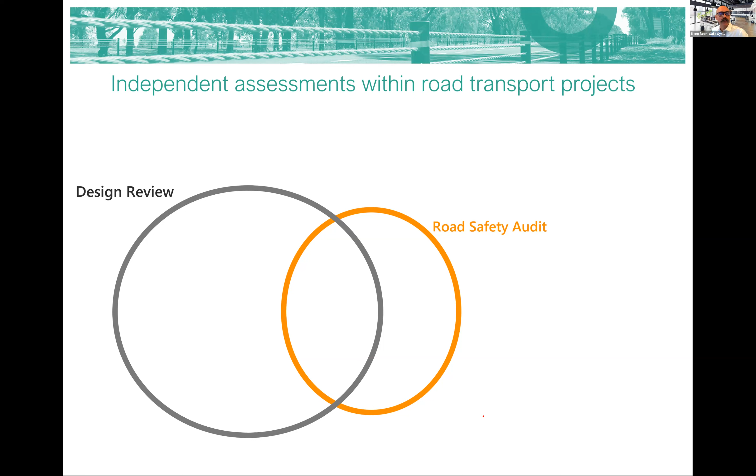So there's also design reviews, and that's a process where if there's a new design of upgrades to infrastructure, changes to the road environment or street environment, the designer will do their design and have a colleague or somebody do a review of their design. So that will also intuitively look at safety issues and identify things. There's a bit of overlap between a road safety audit and design review, but there's many things in the design review that are not covered in audits, and vice versa.

So safe system assessments, which is what we will be going through over this week, do overlap with road safety auditing in its current form and some design review stuff. But there is quite a bit that sits outside here that's not covered in a road safety audit. And the reason I mention that is a very common thing that will be said to me or to others, and probably to yourself after you've done the course, is, well, I don't need to do a safe system assessment, we get a road safety audit done. So they're not understanding there are things outside of that.

And that's everything from identifying particular issues, but also the way things are presented and what we can use the safe system assessment methodology for. So there is extra stuff in there and extra value. We have these other things, safety in design, which many of you will have heard about. There is overlap again in all of these, but safety in design is a little more focused on the safety of workers in the construction of whatever these changes are, in the management, the maintenance, the decommissioning. So there is a little bit of overlap there.

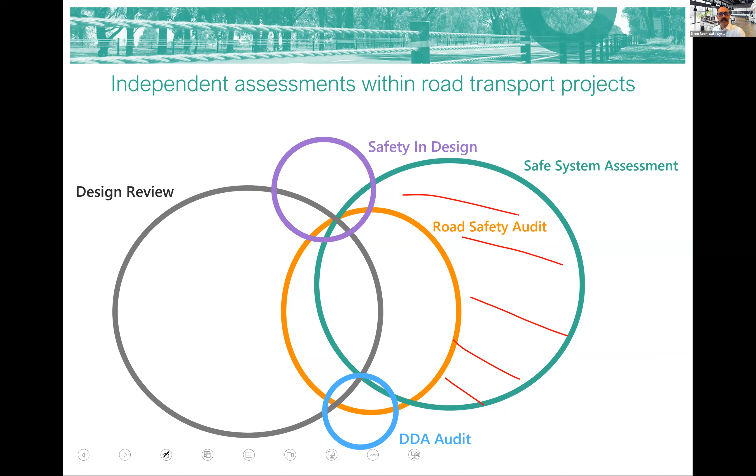Okay, so I might get into some content now, and I will be asking you a few questions shortly as I tick along. But the first thing we need to do in a safe system assessment course is just make sure everybody is on the same page with what this thing, the safe system, is. So some of you are absolute experts in the safe system, and that's great. Some of you, it's probably a new concept. Some of you probably feel you know what the safe system is. You've got some key phrases that you bring out.

I'm going to really dig into practical understanding of the safe system philosophy. So we're all on the same page as we delve into then being able to look at a project or an existing bit of road and understand how well it aligns with these principles of the safe system. So by the end of this module, we're going to go through and recap or list the elements, pillars of the safe system. We're going to determine kinetic energy thresholds for different crash types.

We're going to look at the difference between traditional approaches to road safety and the safe system approach. We'll touch on behavioral change and vehicle safety interventions, which is an interesting thing to do, and I'll explain how they fit within a safe system assessment context. And we will talk about speed as a critical element to the safe system approach.

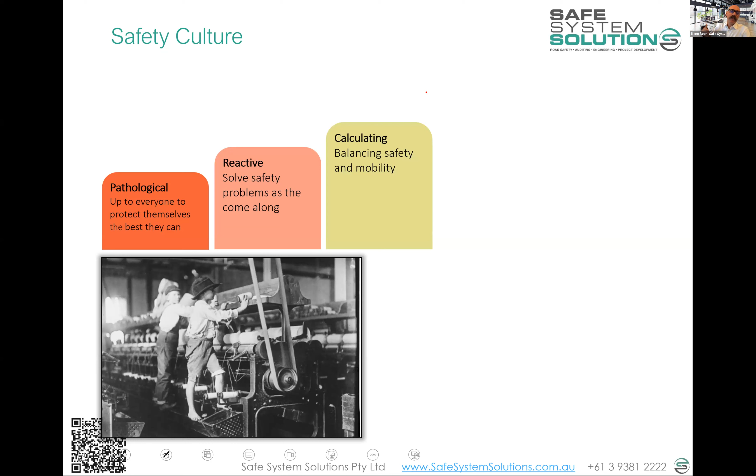Then there's this elevation up to what we call a calculating safety culture, which essentially says the economists get involved, and they say, well, actually, we've analyzed all these factories, and if we invest in guards for all these different machines, we will, over time, reduce the number of payouts to injured parties and the families of workers that are killed.

And that's going to be good. Less payouts, and actually the machines aren't down, and so we're producing more widgets, so we are able to make more money. So this investment of, I don't know, £30,000, there was pounds back in these days, is actually going to return £90,000 over the next 10 years, and we've given it a benefit cost ratio of 3, right? So that's what we call a calculating safety culture.

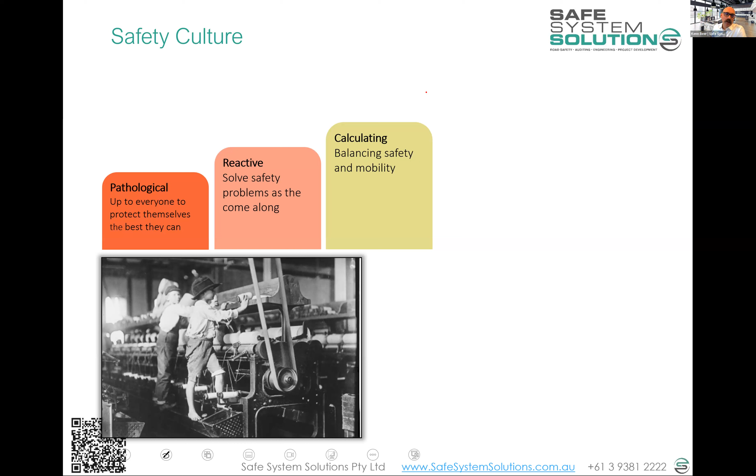Where we go to from there is what we are aspiring towards, what is safe system aligned, which is what we refer to as a proactive safety culture, which says we need this very high level of safety, and we will make widgets within the envelope of that safety. If we go outside of the envelope of safety that we've set, widget production will stop until we're back into that envelope of safety.

Now that makes sense for us in manufacturing. Like WorkSafe will stop all production in a factory if they believe something has stepped outside of the risk safety envelope. And the last thing you need to do is maintain that high level of safety. It's like that needs continual maintenance at a cultural sense. You need to continue to ensure the culture of safety is there. And of course, all of the equipment associated with safety is maintained.

So when we think about the road transport system, as I'm sure you've already made this analogy in your mind, we have parts of the road system sitting in most of these, but we certainly have huge pathological safety approaches, which are essentially that we are handing out licenses to people, sending them out into what is an unsafe system and telling them that they have to be safe.

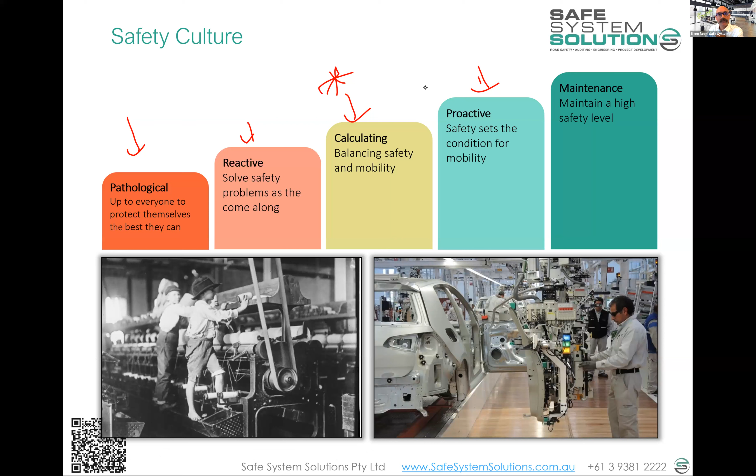So in terms of the proactive versus calculating, you touched on a really good point, and I think it's an excellent point. Having had to deal with a number of projects, trying to prioritize them, or work in that environment where they prioritize them. Yes. I've come across something called wider economic benefits, where people use these wider economic benefits to justify more social projects.

Yeah. And I've always thought that we should be putting a greater value on non-financial elements in determining which projects go ahead. Absolutely. I think you're right. And there is more and more understanding and acknowledgement of the externalities, as the economists would call them, things that aren't directly in the traditional transport economic models and calculations. So I think there is more and more coming along.

Safety is a really interesting one, in the sense that, and I'll touch on this later on in today's session, the desire to blame an individual for a crash is so rife and so integrated into our society that people are less inclined to utilize the safety externality as an economic feature. I will explain that a little bit more.

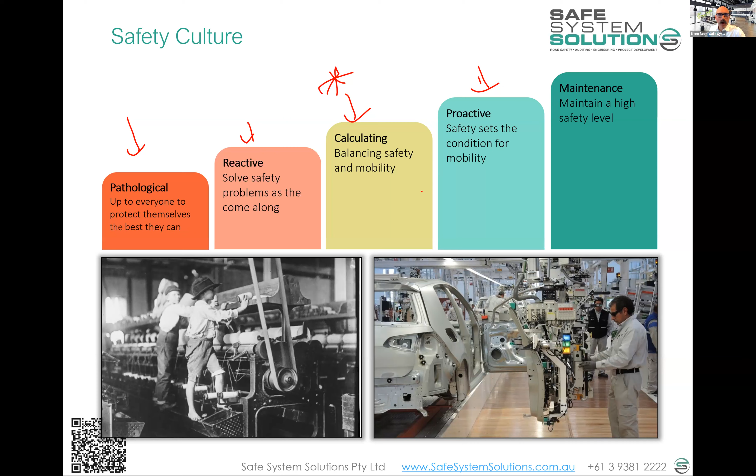Let's keep ticking along. And I'll pop up a little quiz just to get you doing a few things. You are not marked on this quiz. This is just recapping what I've been talking about, and that little discussion with Justin as well. Just making sure we're all on the same page on the safe system before I jump into the next bit. Hopefully that's popped up on your screen, multiple choice. Don't get too concerned because you're not marked on it. In fact, we don't even know who fills out what.

But we like to see what the group's saying. I'll give you a minute to do that. We will have a halftime break in about 15 minutes as well, so you'll be able to fill up your coffee at that point.

Now, you haven't been told the second one of these, the Usain Bolt one.

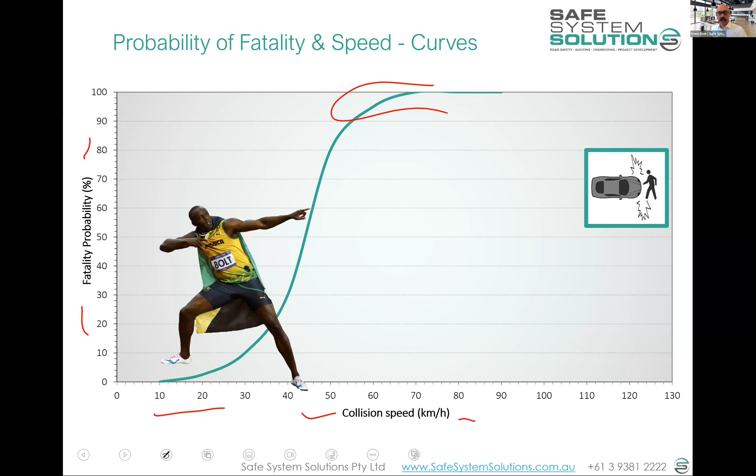Okay, you can test that if you want. Run as fast as you can at a tree, and you should survive, and you should recover to lead a normal, healthy life based on your maximum running speed and your ability to withstand physical force. It's a general correlation.

But there's a really interesting aspect to this, and it's this kick-up point. It starts to go exponentially bad around that 30 kilometer per hour mark. So, small increases in speed above that start to get really big in terms of impacting more of our community, in terms of their ability to withstand physical force. It's not that there's no risk this side of it, but that's a really exponential kick-up point.

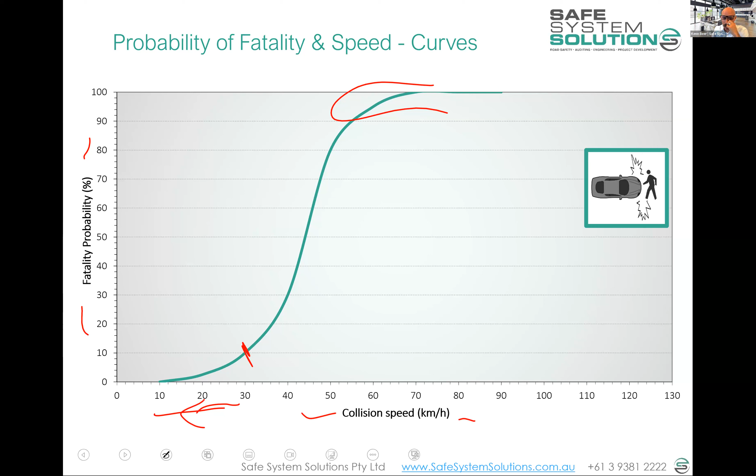We don't want these crashes to happen, but when they do, how do we make it so it's more like this, where they're injured, but they recover and they lead a normal, healthy life, rather than lifelong debilitating injuries or death. And we have that information for some other crash types.

So this is a right angle crash where the bullet vehicle, and this is what we call the bullet vehicle here, is the one that does the damage. This is the target vehicle. Bullet vehicle speed coming in around that 50 kilometers per hour is where it starts to go really bad.

And that'll be the death to the target vehicle driver in this strike. And in head-on crashes, we know it's about 70 kilometers per hour, and that's the speed of each vehicle. So some people say, oh, so that's a 140 kilometer per hour crash because they're both going at 70. Well, it's not. I mean, it is if you were standing in the middle of it and you got crushed, or if one of them was a tiny little smart car and the other was a road train and it got pushed back at 70 kilometers per hour.

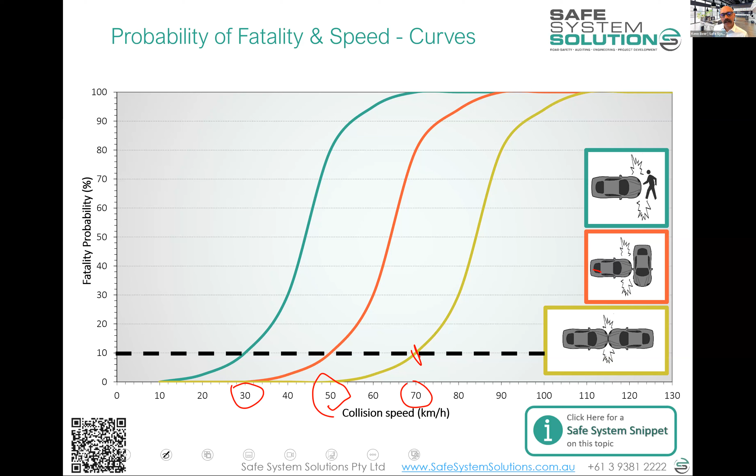This provides a pretty general bit of guidance: 30 kilometers per hour or below when we've got pedestrians who are possibly going to be struck, 50 kilometers per hour or below bullet vehicle speed in that right angle, 70 kilometers per hour or below for the head-on crashes. It gives us a nice start in thinking about human tolerance to physical force.

But we've tried to help you out a little bit more. I put this in when I was involved in updating the Austroads Guide to Road Safety Part 6, which is actually road safety auditing. We want auditors to start to think about this as well as safe system assessors. It lists a number more crash types and speeds, and starts to say it's going to be a grade of some description. It's going to be really bad in this black, pretty great in this green, and things will appear in different spots.

So we can understand generally, and spoiler alert, later in the course we'll be talking about putting quantification to it with numbers. And so you'll be coming back and using this sort of thing to quantify how bad the incident is going to be.

Now, any questions at this stage, Loretta? Just a comment here from Darren, on the previous slide, based on the graph. It is interesting, school zones are 40 kilometres per hour and not 30 kilometres per hour. Yeah, so it's a good point. And actually, as I mentioned earlier, the 40 didn't get us to quite where we want to be.

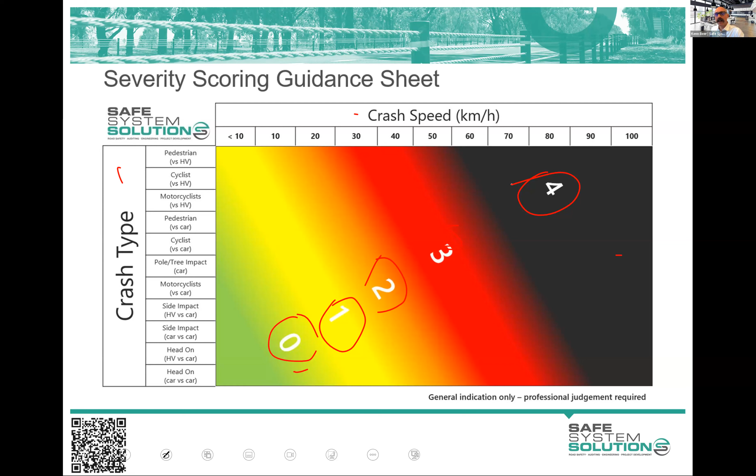Yeah. So Justin's put in there, I just saw that pop over the corner of my eye, some of the controversy around the recent Yarra City Council 30 kilometer per hour speed zones, which shows you some of the challenges we still face in what are obvious and reasonable speed reductions in highly urbanized, pedestrianized areas. But there's a long way to go in ensuring that everybody has that understanding. I'll talk a little bit more about that shortly.

I'm just going to go through this, and then I'm going to give you a little exercise to do while you fill up your coffee and have a stretch and the like.

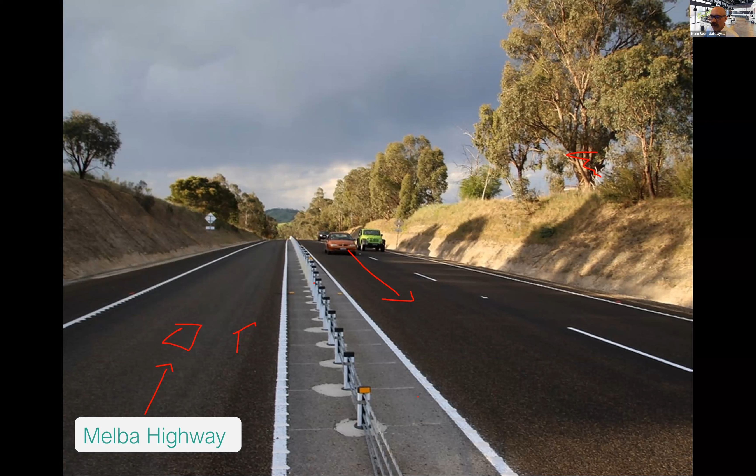Justin, motorcyclist. Yes, the motorcycle community were active in that. There's a prize there. I better stop giving out prizes here because I'll run us out of prizes in this first one because everything here is very good. All of these things were issues. I'm just reading through them. Good. Thank you, everybody. Lots of good stuff there.

And the reason I bring this up is because safe system assessments didn't exist at the time of this project. And if they did, I think they would have been very helpful. The reason for that is, okay, we're changing the road environment. And this is not something that was commonly done at the time, okay? But so what they did was a road safety audit. Now, what is a road safety audit's mandate? It is to identify risks and issues, and that's a really good thing to do, okay? A lot of the things you've brought up there were brought up in road safety audits, and so the report would come in and it would just list lots of risks, and it made the project look very risky,

right? There was no independent sort of tool to actually say how effective it will be in reducing death and serious injury, or how much better it aligns with safe system principles, or how good it is. But that's what a safe system assessment does. It actually quantifies the benefit of this project in terms of safety, and then proceeds to try to do what's possible in terms of adjusting any residual risks that may occur as a result.

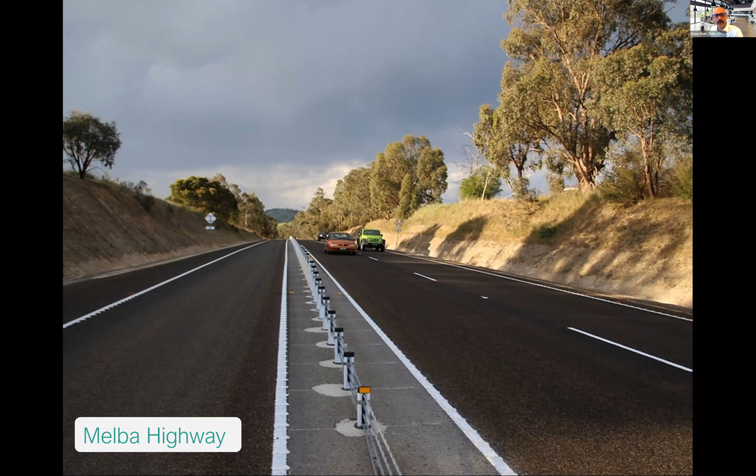Safe system assessments would have made this job so much easier to actually get on the ground. Interestingly, that one got hit not too long after it was in place, and the engineer responsible for that project got a call from one of the people involved in this strike, and I'm sure many of you have been on the other end of those phone calls, or any call from the public you think you're going to get shouted at, that's for sure.

But they actually just wanted to thank them and said, I've been driving that road for many years, and I've never had that barrier there, but then this time it had the barrier, and then somebody came directly at me and hit the barrier, must have saved our lives. Anyway, the engineer who got that call was smart enough to say, "Can I have your details? I think our comms people might like to talk to you." And they made a little video, which we've put into the learning management system, just a 2-minute video.

And I think it really captures nicely the fact that one of the drivers fell asleep. They're very open with the fact they fell asleep, right? And they left their lane. They hit the barrier system. If the barrier system wasn't there, they probably would have killed themselves and others off a mistake of falling asleep.

Gee, we don't want people to fall asleep on the road, and we should be trying to encourage people to not drive in that state, but they will. So much of that happens, and it'll continue to happen. And for us to push and just point our finger and say, well, people shouldn't fall asleep, is not the way we're going about it.

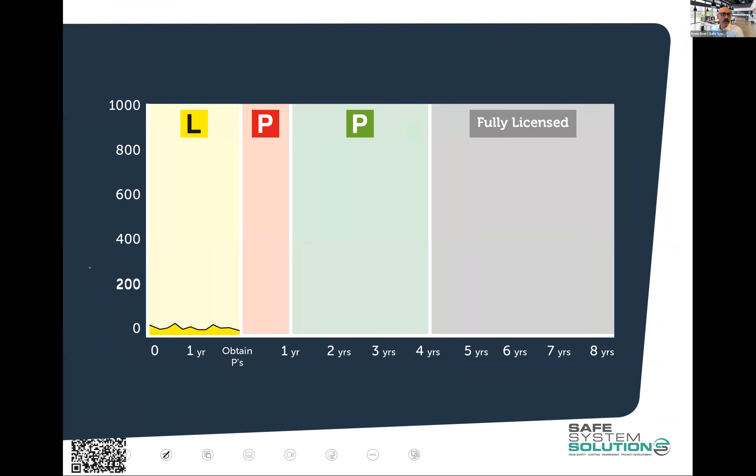This is used a lot. It shows crashes. Now, these are just raw crash numbers, but actually, when you do it by crashes per 100 million vehicle kilometers traveled, it's not that dissimilar. When drivers have a supervising driver next to them and they're in the learner phase, there's very low crashes. As soon as they go out on their own, it goes off the charts and it comes down, and then it just flattens itself out.

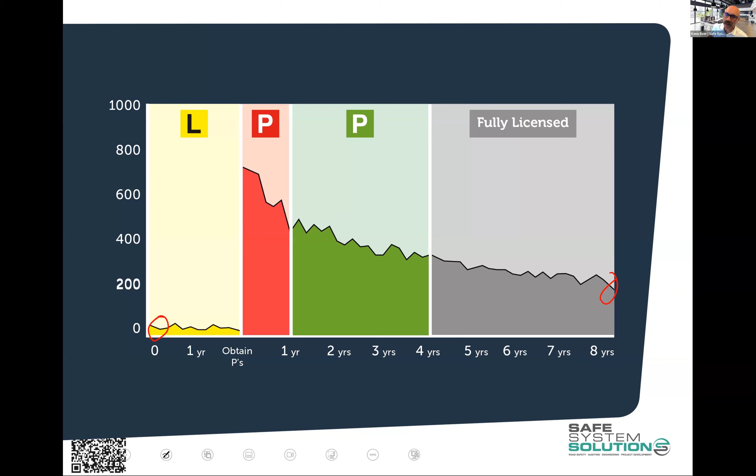And so anybody who ever says, oh, well, no, the problem is people don't know how to drive, and if everybody was like Michael Schumacher or Daniel Ricciardo style drivers with those skills, we wouldn't have any road trauma. That's absolutely not true. I mean, these people are safer than these people. That shows immediately that it's not necessarily a skills-based thing. There's a whole lot more going on to that.

I think encouragement's something we haven't done a lot of in road safety, and we can do a lot more. We can use incentivizing campaigns more, trying to encourage people to drive safely in one way or another, or ride safely or walk safely. I mean, there's simple incentivizing campaigns such as, if you get through your probationary period with no demerit points, you get a free license, which some jurisdictions are doing. There's some evidence that it actually seems to be somewhat effective. So that's good. There's other incentivizing campaigns out there.

Giving specific behavioral change techniques as opposed to just generally drive safely sort of stuff. If you say, take a break every 2 hours of driving, that's a very specific message, and it's clear and people can action that. Some of the marketing and advertising gets a bit hard. Comedy is quite effective for recall of message, so that's good. Does it change behavior? Sometimes it's a bit hard to evaluate a lot of this.

We've put a handful of different road safety ads into the learning management system for you to have a look at, and some of them are quite witty, quite funny, and do get excellent recall. And some of them have managed to see some behavioral change as well. But we'll see more and more of this: trying to change a culture and trying to get people to think Safe System a little bit. You've probably seen this type of ad, which has a video with it, but it's talking about other people making mistakes, not saying, you're going to make mistakes, so slow down. Other people are, and we all need to slow down a bit. So it's a sort of alteration, thinking about mistake making.

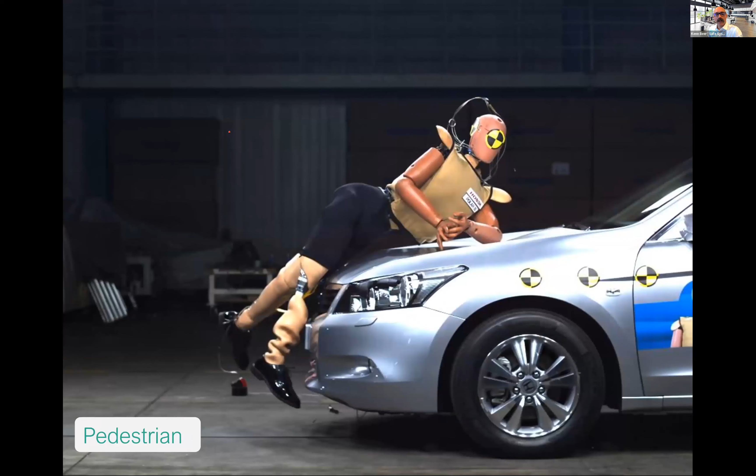So bonnets pop up, or airbags over bonnets. All new vehicles have pretty much got those sorts of pedestrian safety features, giving us, I suppose, more force can be absorbed before it's transferred to the human.

But the question that often comes up is, you know, why bother? Why are we really doing anything? Like, surely autonomous vehicles are just going to solve everything, aren't they? We'll all be out of a job, which I'm very much looking forward to. But unfortunately, this doesn't seem to be anytime soon. And certainly the modeling that's done by all sorts of areas shows that 2050 scenarios don't include a huge amount of these sorts of vehicles without steering wheels.

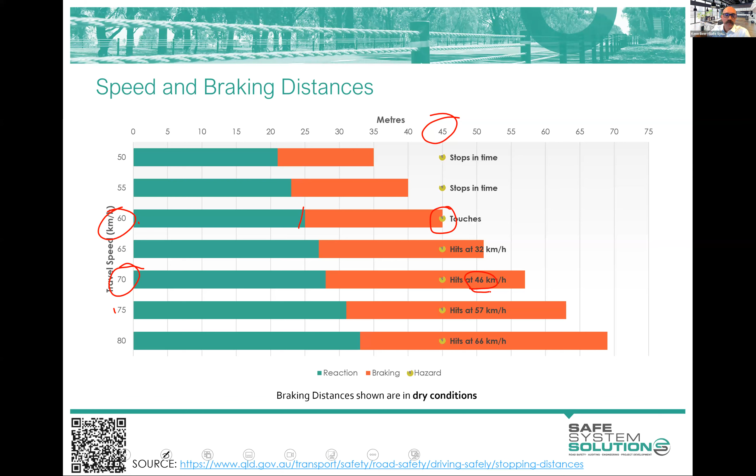You know, somebody steps out 45 meters away, the driver needs to process that they've got to do something. That's sort of our reaction time. Then they brake and the physics sort of takes in and they'll just stop right at that point. If we go up to 70 km/h as travel speed, 10 km/h more in travel speed, you can see that they hit at 46 km/h, not just at 10 km/h more. So we have this non-linear relationship between travel speed and impact speed. So that's an important thing to note there.

And if we overlay on that those graphs we saw with Usain Bolt earlier, and there's a lot of different studies again around the world, they're generally showing that there's a power relationship, so a fourth power relationship for fatal crashes, and a third power relationship for serious injury. So if you don't remember that from maths class, it's just saying that for small increases in speed, there's really quite big increases in the chance of fatal and serious and less for other, but it's not a linear relationship.

So if we can adjust travel speeds down, we just see amazing benefits in terms of fatal and serious injury crashes. And that pretty much is unanimous across the board. I rewrote the Austroads Guide to Road Safety Part 3, which is speed and speed management. Put a lot of this in.

And at one point, I just listed from around the world many times where speed limits had been decreased on roads, big sections of roads and the road network, and it improved safety, and then vice versa. Speed limits have been increased and it had increased the number of deaths and serious injuries.

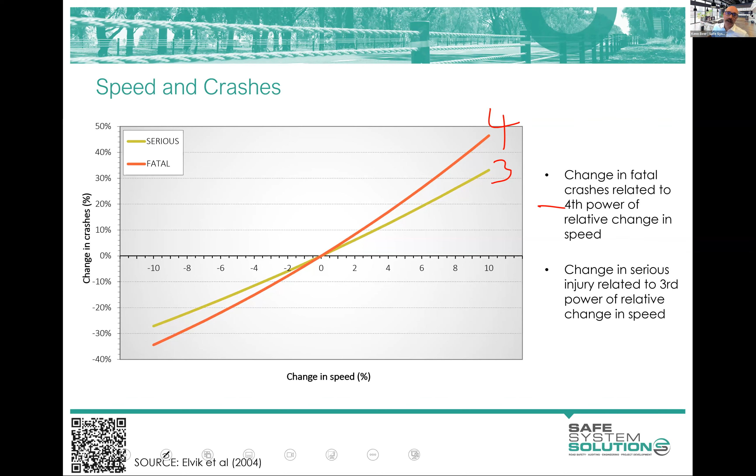But it is interesting to do. When you talk about the severity of a crash, most people understand that lower speeds will be less trauma, so that's something we can maybe work with.

This diagram, a Swedish diagram, is basically saying that once you know the biomechanics of injury of your population, which is pretty much the same all around the world, and we've got some pretty good data on that, you then understand what you've got in terms of a road environment, the users and the vehicles, and you just filter it through the appropriate speed, and you have a safe transport system. Speed is the governing factor based on what you've got. You can have very high speeds as long as you've got appropriate vehicles, roads, and road user elements.

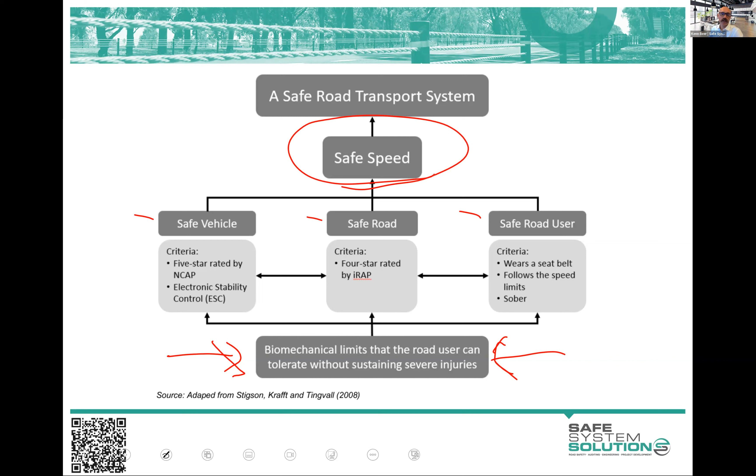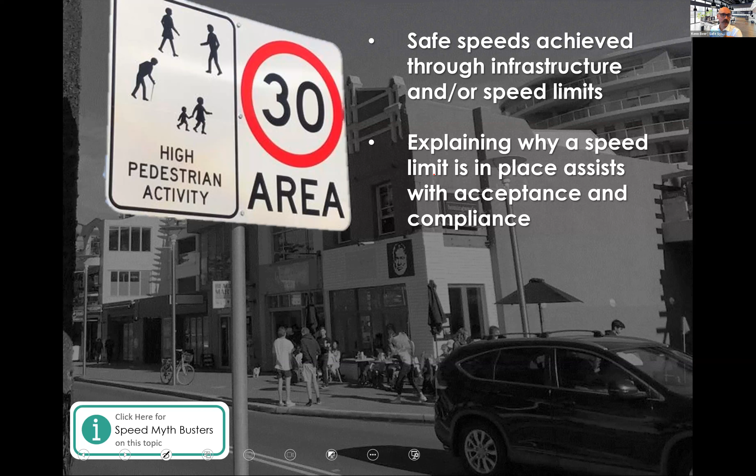So we know safe speeds can be achieved through infrastructure and/or speed limits. Infrastructure is very effective in terms of managing speed. So local area traffic management, highly effective. Speed limit reductions can be a little bit challenging sometimes. Explaining why a speed limit's in place is effective for acceptance and compliance. And vulnerable road users are generally accepted pretty well as a reason, noting our little Yarra study that's popped up recently.

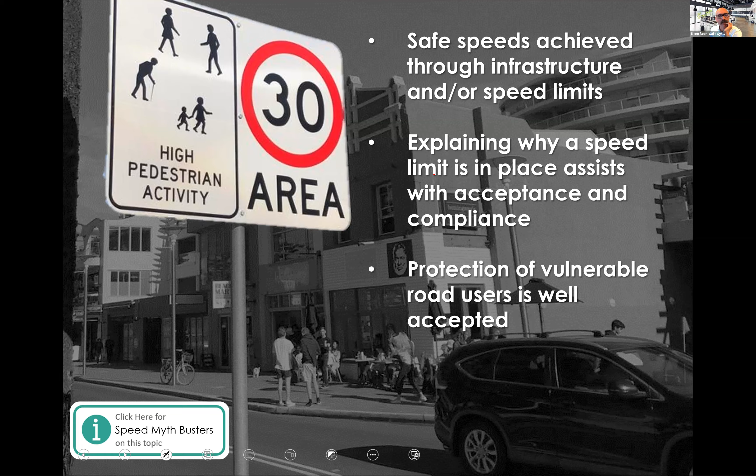Risk has traditionally been looked at as the chance of a crash, so likelihood, times the severity of that crash. In a safe system assessment, we have taken likelihood and actually taken exposure out of it as well. So we say, how many people are exposed to a crash area, crash type? What's the chance of the crash at that location? And then how bad is it going to be? And so what we're going to pick up next time is starting to unpack these three things: the number of people exposed to a crash, the chance that there will be a crash, and how bad it will be.